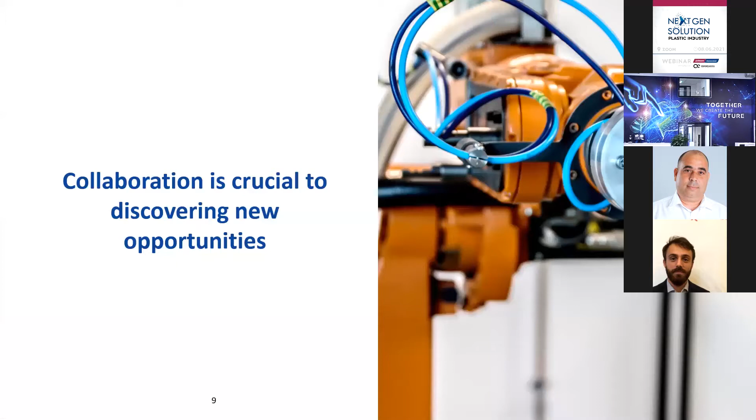Next one, please. It was the previous one.

Yes, this is correct. Hydraulic oils, as you probably know, are an almost invisible component. Some of them are really invisible, transparent. They are a component that may account for less than 1% of your total operating costs, a very small amount. But this component is critical to keep your equipment running, and running well.

We always use this kind of metaphor: while the hydraulic pump is considered the heartbeat of your injection molding machine and of the hydraulic system itself, the oil would be the lifeblood that transmits the power throughout the system and the equipment. With this metaphor, you can understand how much we care about hydraulic oils and how important they could be for the correct operation of your equipment.

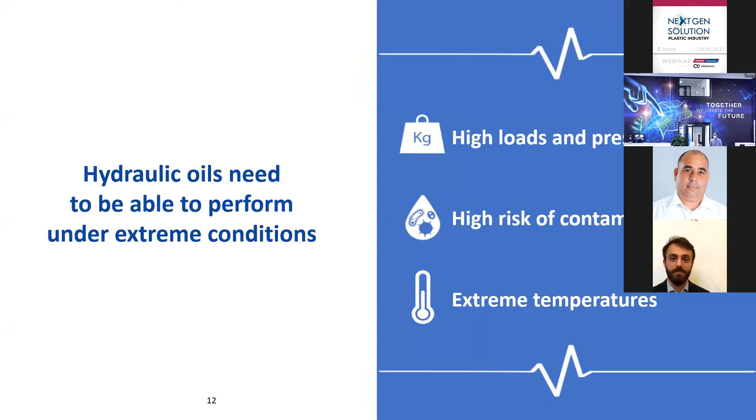Thanks. As I told you, hydraulic oils need to perform under extreme conditions. They have to withstand sometimes extreme loads and pressures, up to 60,000 tons, sometimes in high pressure systems, high levels of contamination that, of course, can be harmful for your equipment if not treated well, and they should operate in a wide range of severe operating conditions, sometimes with temperatures that can go up to 100 degrees centigrade.

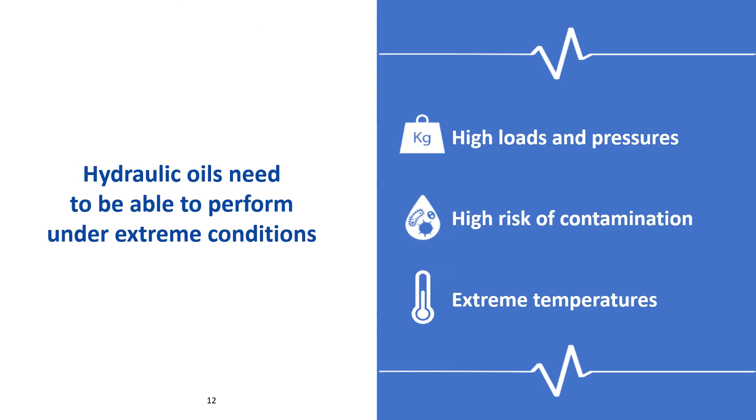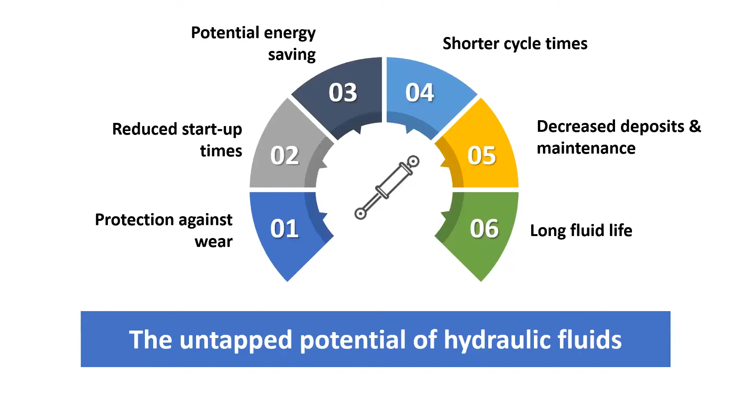We can go to the next one, please. High performance hydraulic fluids can offer an important range of benefits, including extended protection against wear, potential to reduce startup times, sometimes saving energy, reducing cost, enhancing efficiency, and of course increasing the uptime of your facility.

You can go to the next one. We as ExxonMobil, and our distributors, our Mobil authorized distributors, have the products and all the services that can help you safeguard your productivity.

Let's have a look now at hydraulic oil of the series DTE 10 Excel, that can help you reduce cost and improve productivity. For the sake of time, today we will be focusing on DTE 10 Excel and on hydraulic efficiencies, one of the potential benefits, as I told you. DTE 10 Excel is our top performing high viscosity index, zinc-free mineral hydraulic oil.

Okay, let's start and have a look first at a small summary of the theory behind hydraulic efficiency. In a hydraulic pump, when the pump starts to rotate to activate the hydraulic unit in your injection molding machine, we can identify two different dissipative phenomena.

The first one is linked to the power that the pump needs to pump the oil throughout the system itself. We define this as mechanical efficiency, the energy wasted to rotate the pump and win the internal frictional losses of the fluid. The second phenomenon is linked to internal leakages in the pump and is called volumetric efficiency.

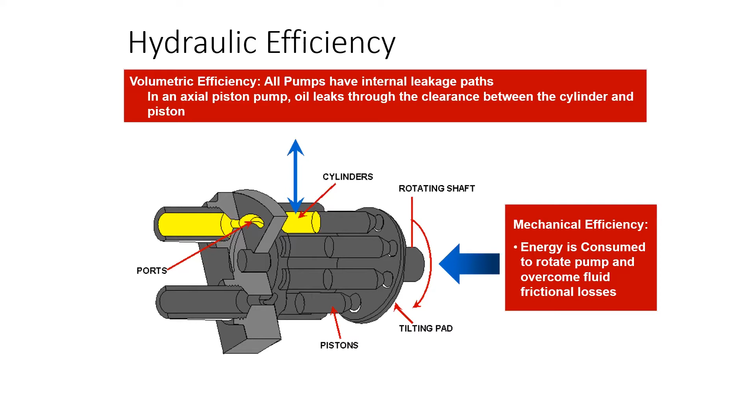Well, you probably know that viscosity varies with temperature. As temperature increases, viscosity decreases. During a day of production, conditions such as temperature may vary for several reasons. For example, when we start up equipment, it is cold, and during the day it warms up. Late equipment sluggishness is sometimes called PM fade, and this is due to the loss of volumetric efficiency because of temperature increases.

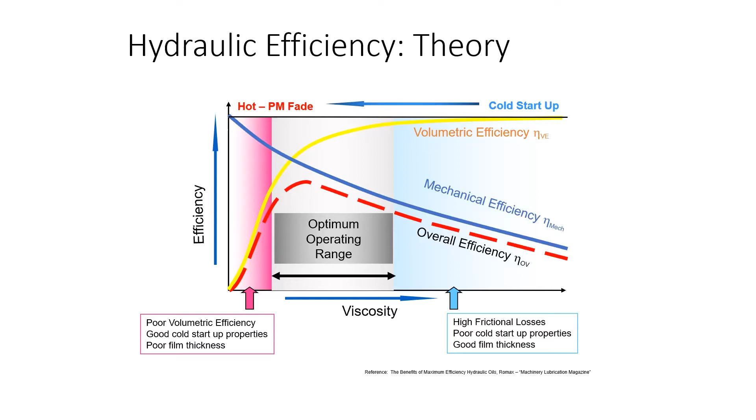So high viscosity index allows you to have higher viscosity at higher temperature, that contributes to better efficiency at higher temperature, better volumetric efficiency at higher temperature. And the high viscosity index gives you lower viscosity in cold environment, which means you will use less energy to pump the oil during startups.

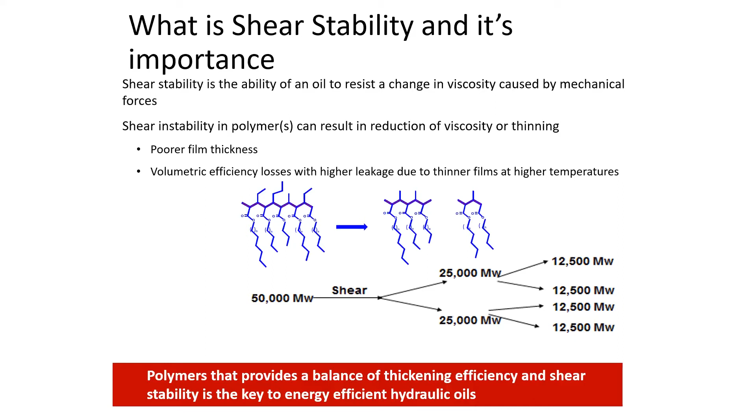The shear stress is not an uncommon situation. It is usual to stress the oil with shear forces, for example, in the pump of the hydraulic system. If the polymers are not well selected and are not able to withstand this shear stress, they will break down, causing viscosity drop, and of course loss of viscosity-temperature characteristics of the fluid. Let's move to the next slide, please.

To test these shear stability properties, there is a bench test called the KRL test, and it can be used to simulate high shear conditions, to accelerate the viscosity breakdown and to compare results between products.

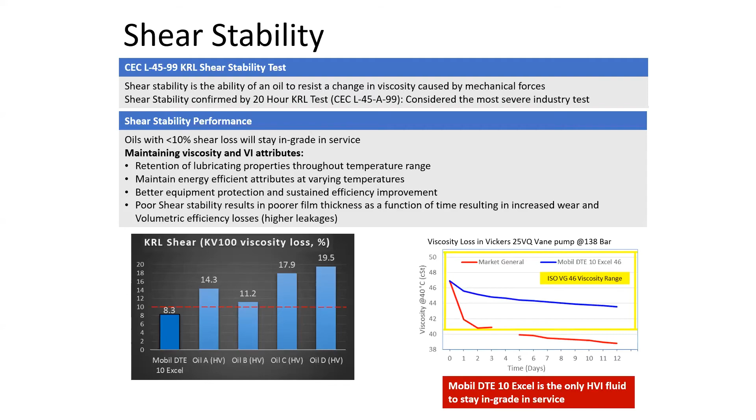I showed you how the right product can lead to a potential benefit in terms of energy savings. Now I would like to talk about how our lubrication engineers can prove, and have proved, this benefit on the field, measuring directly from operating machines. First, let's have a look at an indirect measurement of energy efficiency.

Using thermal images on the same equipment before and after changing the oil to DTE 10 Excel, we were able to observe a decrease in temperature of the equipment.

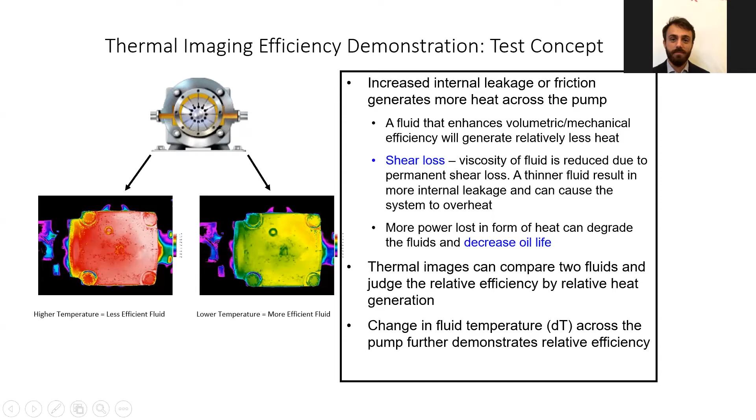As you can see in the picture in this slide, these are pictures of a pump. The right one is using DTE 10 Excel, while the left one is using a non-high viscosity index, non-energy efficient oil. You can see that the pump working with DTE 10 Excel has a lower operating temperature.

This decrease in temperature is linked to the fact that the fluid generates less volumetric and mechanical losses. Those reduced losses generate less heat in the pump, and as a consequence the temperature will be lower and overall efficiency will be higher.

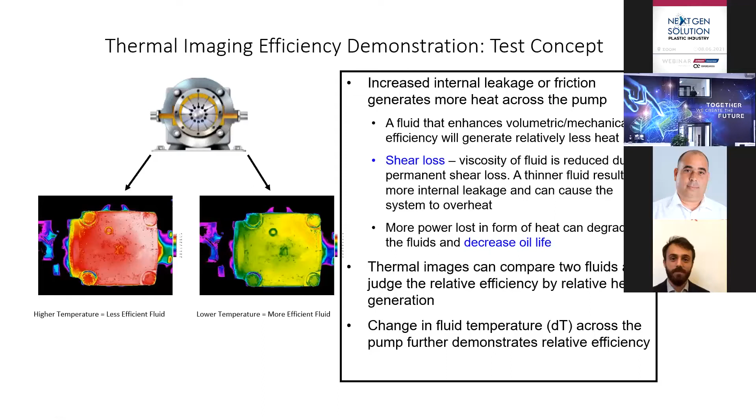Of course, we can also measure directly the energy efficiency improvement. It's a little bit more complex, but we are able to do it. We have all the equipment and knowledge needed, and we can measure directly the energy consumption for a given period of time.

We usually run a test on a machine that we call an A-B test. We start with product A, the usual product, then we switch to DTE 10 Excel, product B, and measure both products under the same operating conditions. Then we plot the results. We need to take measurements for quite a long amount of time in order to have meaningful data, which we then analyze.

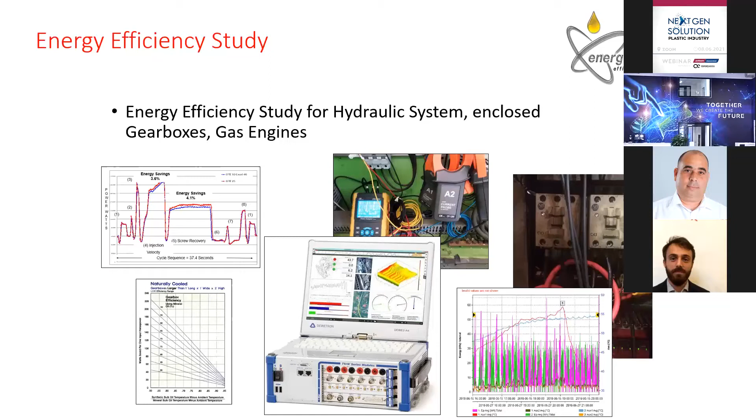For each cycle we look at how much energy saving there is. It's important that operating conditions are as close as possible when running the test with the two different products. We can go to the next slide, Lina, please.

I want to give you at first an overview of our brand new showroom here in Kottingbrunn. It has been refurbished over the last 2 months, and I want to show you which machines are available if somebody is interested to see the opportunities we have here in Kottingbrunn.

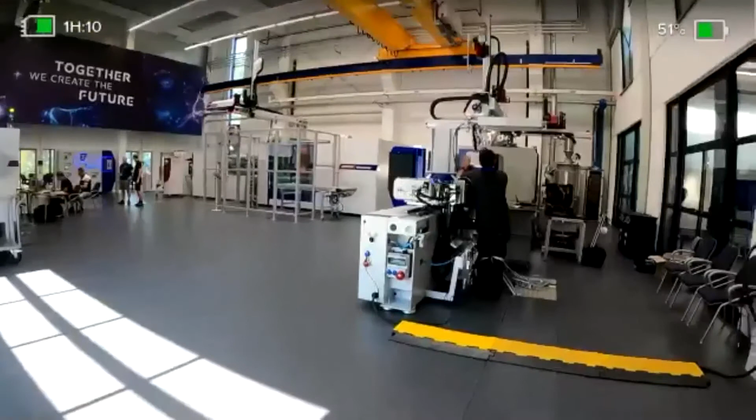Let's take a move at first to the southern part. I want to give you a short overview. We have here located 4 machines right now. One of the machines is this little smart power with 25 tons, and this smart power is prepared now for a customer in Germany. Our service technician is here already to take over the machine and bring it directly to the customer. Here's some details of the machine.

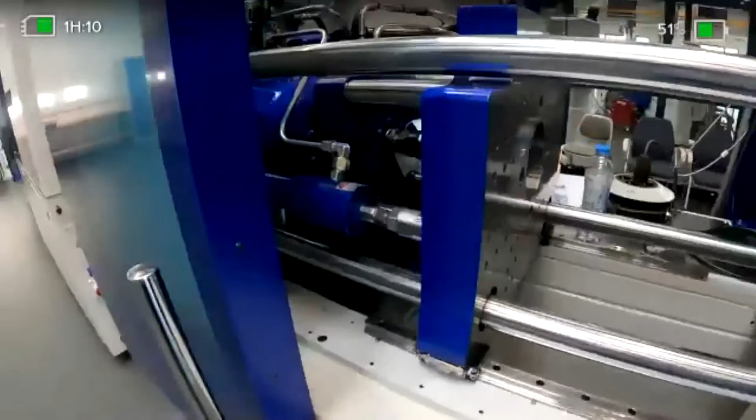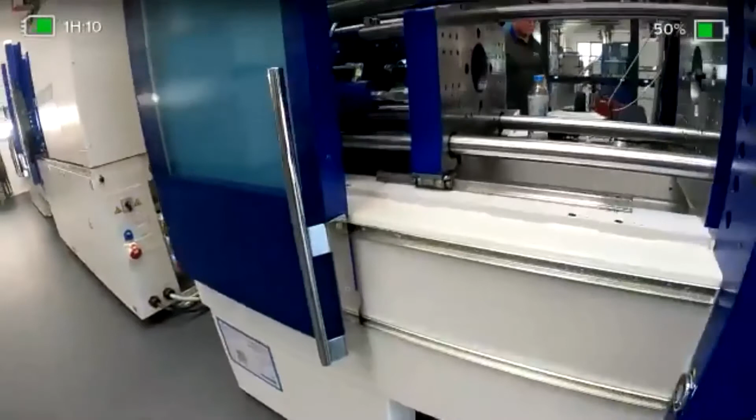This is, for example, a quick coupling system for the ejector, the hydraulic plunger here in a 3-platen version. And with the linear rails, you have the possibility to have a very competitive and very exact platen parallelity, which is important for your mold.

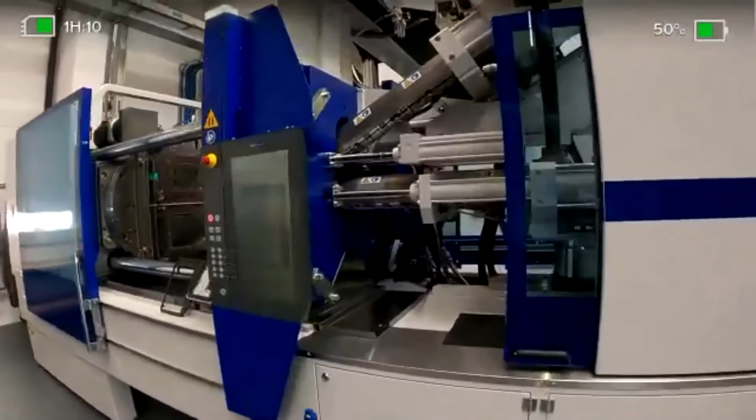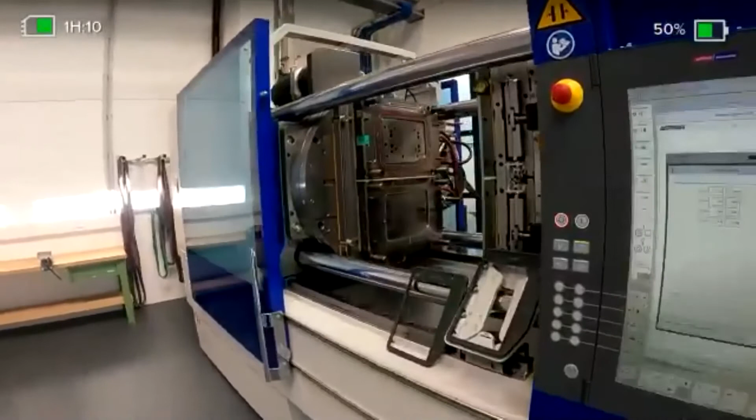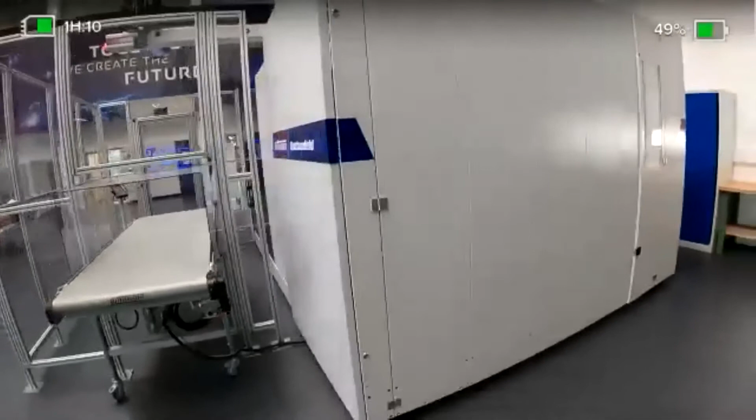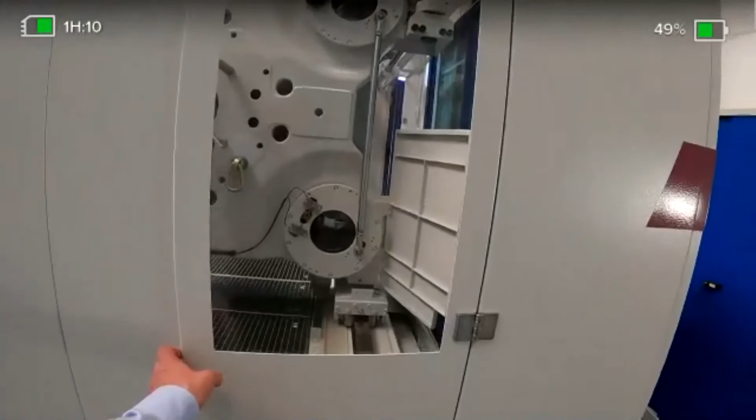Another machine is here in the back. This is a 1,100 ton machine already, a 2-platen system. I want to give you a short overview of how the machine is equipped, so I'll go through the safety door on the rear side of the machine to show you some details of the clamping unit.

It's a 2-platen machine, and as you can see, this machine is also equipped with linear rails. You have direct access here in the safety door to the ejector, equipped with a quick coupling. And very interesting is also the 2-platen system. When you look inside, you can see the quick lock system.

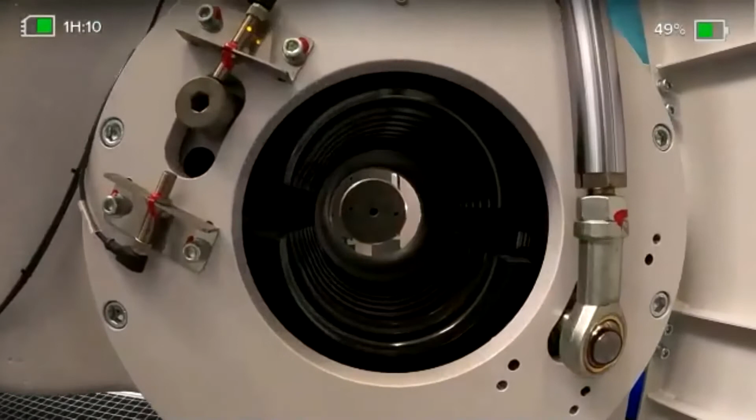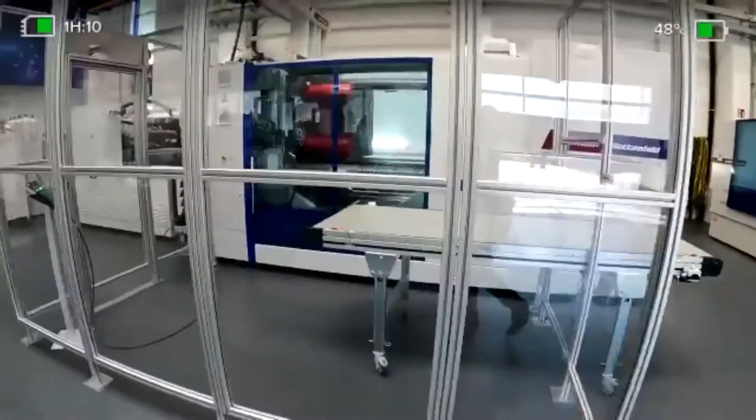The advantage of the system is that you have a possibility to move in the mold from the side, because the tie bars swivel out of the machine. So you can move in the mold from the side and not from the top, especially interesting for executions where the ceiling height is not too big.

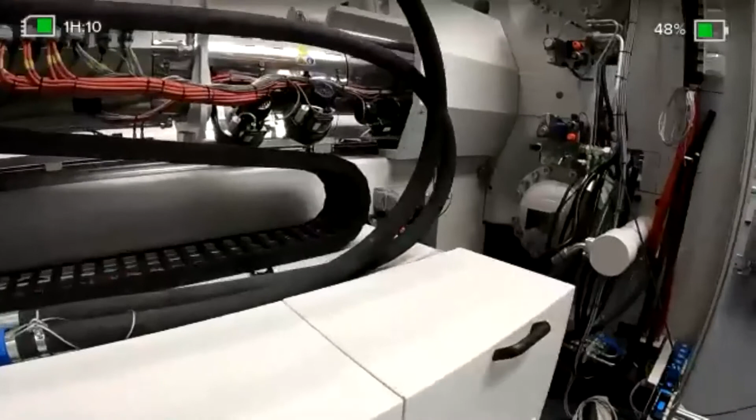This special machine is equipped with a Cellmould system. What is Cellmould? It's a foaming agent introduced with nitrogen into the machine, located here directly at the barrel. With this execution, you can make lightweight parts, which reduces the weight of the product, and not only the weight - it also reduces the clamping force a little bit because the internal cavity pressure is lower than usual.

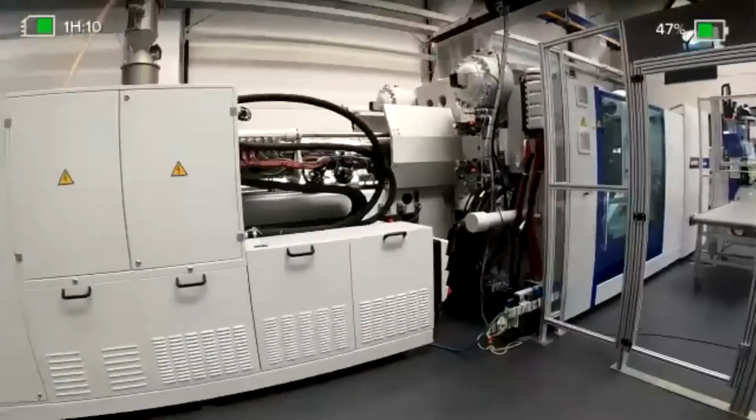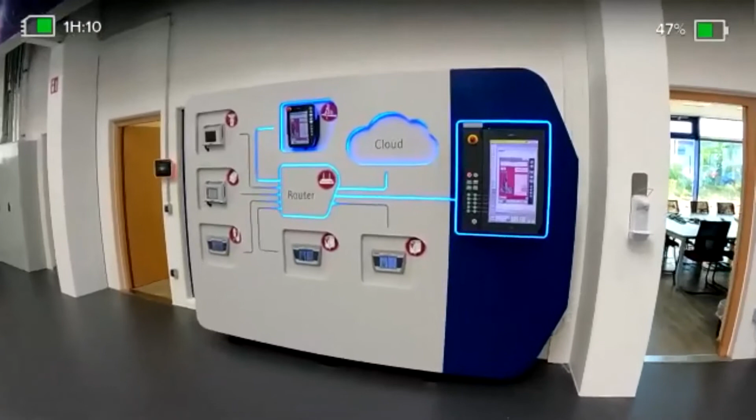In this area you can see now the 4.0 system of Wittmann. This is the answer to the Industry 4.0 system, and this execution integrates all the peripheral units from Wittmann.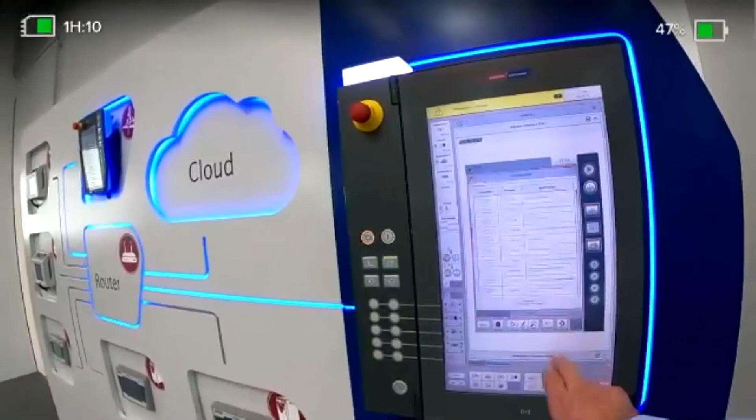Here you can see the robot, which is integrated into the system. You can handle the robot here, open up the alarms, and go to the other side - when you do the same here, it's the same possibility. So you can operate the robot on the machine panel as well as on the panel of the robot.

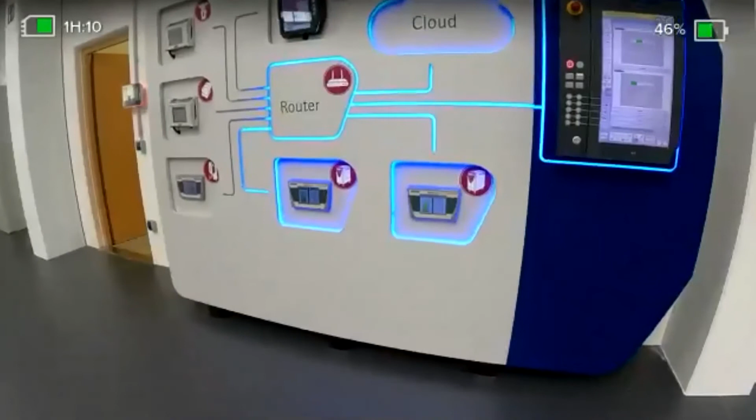When you go to the tempering units, you can see those tempering units also working on the control system. The big advantage is, if you have any issues, you have the possibility to service the tempering units also directly on the screen.

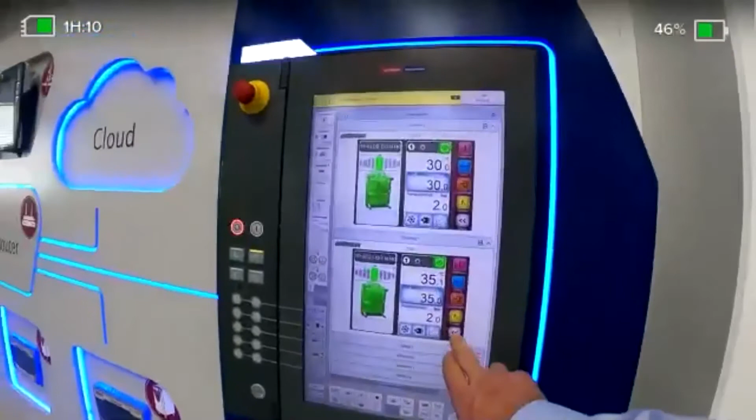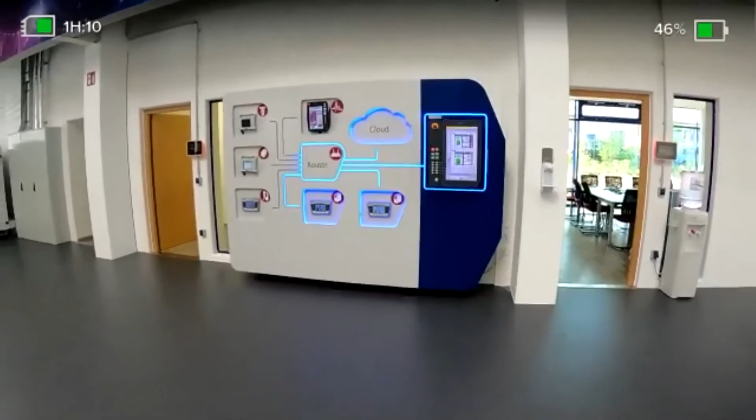And the big advantage is also, when you go to a web station with the machine, then you have access to the external units as well.

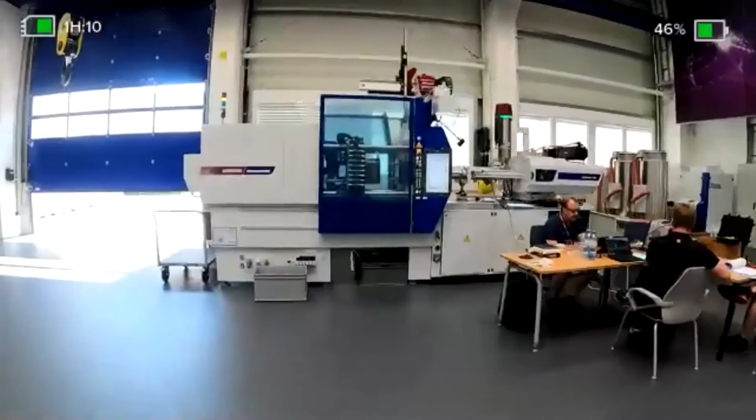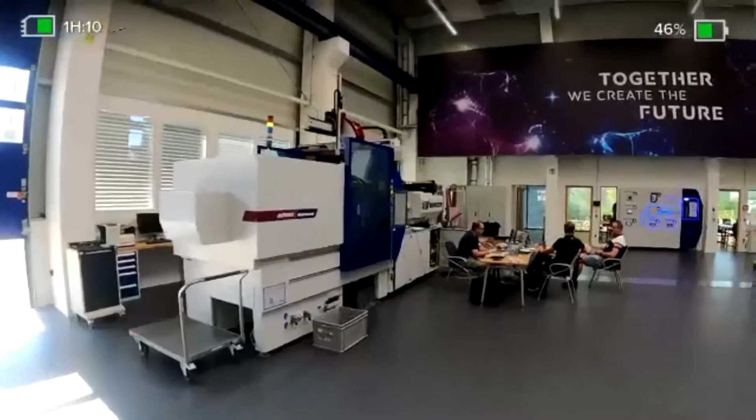In this range, we're making a test run with LEGO. They have a very special machine equipped, and the test run will take about a week. If the acceptance run goes perfectly, they will take over the machine equipped with a robot, the Wittmann robot, and it's a fully electric machine, EcoPower 160 tons.

Going back now to the northern part of our showroom, I will show you the machines available here in the northern area. I would like to start with one of our machines available for customer test runs - this is our SmartPower 120, also a hydraulic machine.

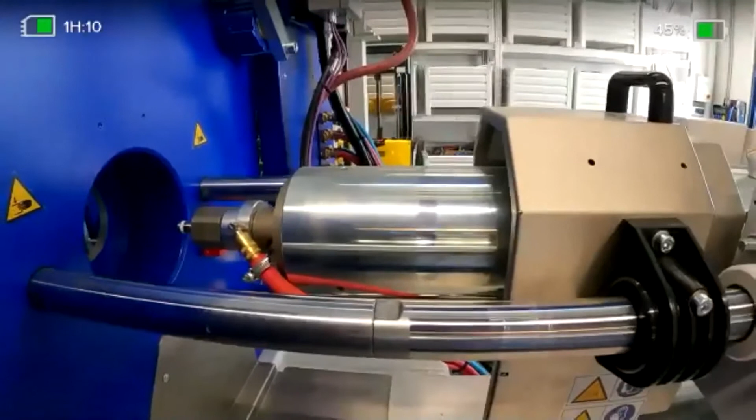This machine is equipped with a liquid silicone rubber barrel, and that could be implemented in any machine, also our smallest machine, the MicroPower, which we'll see a little later. Here you can see the barrel, which is equipped with cooling water, and so therefore there are no heater bands available.

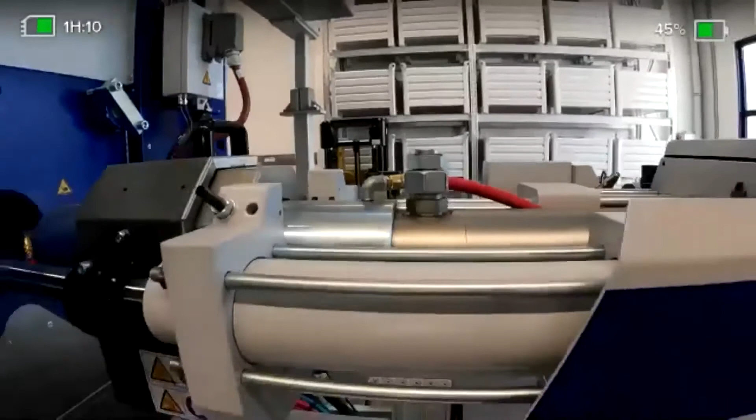We have a very special execution of a shut-off nozzle that is necessary for this kind of application for LIM, and this is the connection for the material. If you're interested, we could also install an LIM pump that transports the material right into the machine. So this is a 120-ton hydraulic machine.

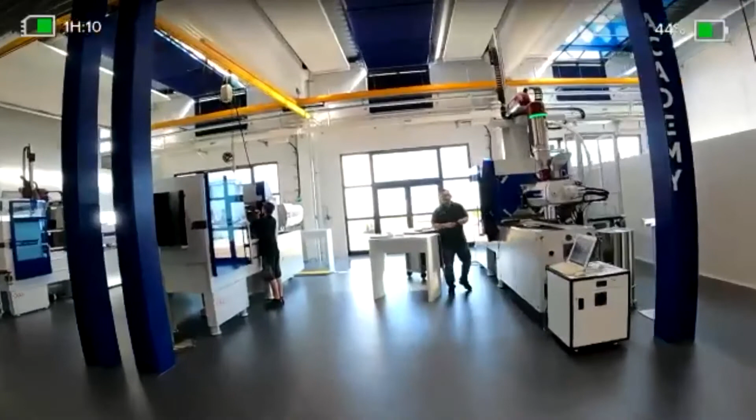And if you move over, you can see here our academy, which is right now in the scenery of application, and Christian Setko is here, and he will explain a little bit what he is doing.

Hi, Christian. Dear guests, welcome to our training area. Currently, I'm preparing this Smart Power machine for my upcoming customer training. The application will be a small lunchbox made of food-grade material.

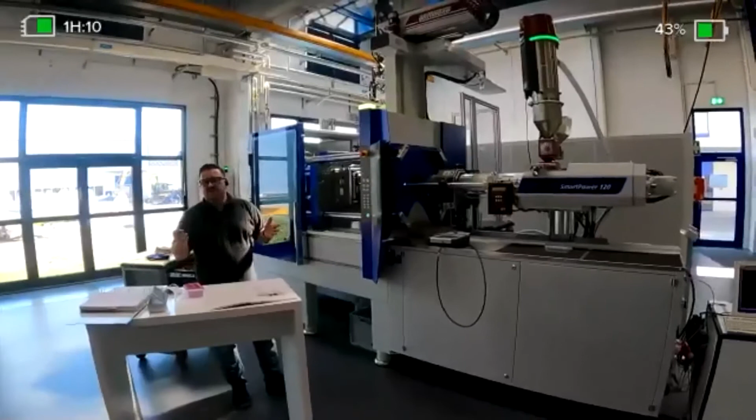Actually, the customer knows about the injection molding process, but he wants to know more details about the B8 controller, so we will do a basic B8 setter seminar. Of course, we offer different kinds of trainings on the machine and on our equipment. For example, usage of the different machine types: Smart Power, Eco Power, Micro Power, Micro and Macro Power, and also maintenance and service.

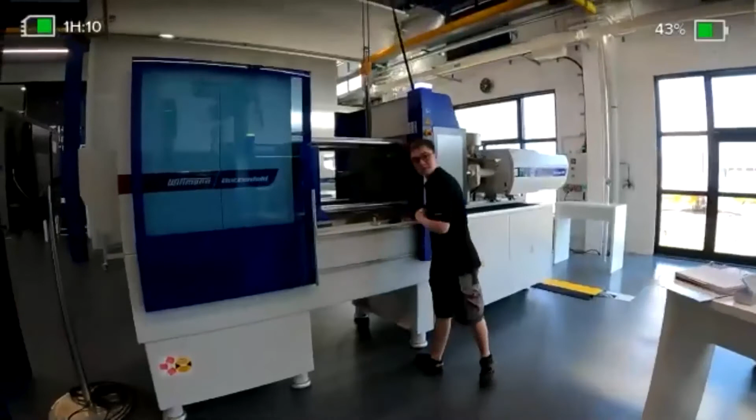Right now, I see there's something going on here in the training area. This is Stefan. Stefan, could you explain what you're doing right now? Customer test, right? That is scheduled for next week. Right now I'm fixing the plate on the nozzle side, and then later I will close the open side, and then I will fix the plate here. Thank you, Stefan.

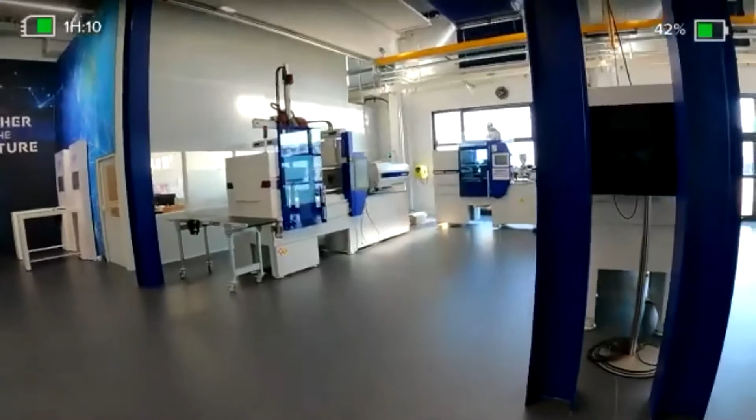So this is the training area, which is equipped with 4 machines with different executions, available also for different kinds of trainings. So we have room for 8 persons maximum.

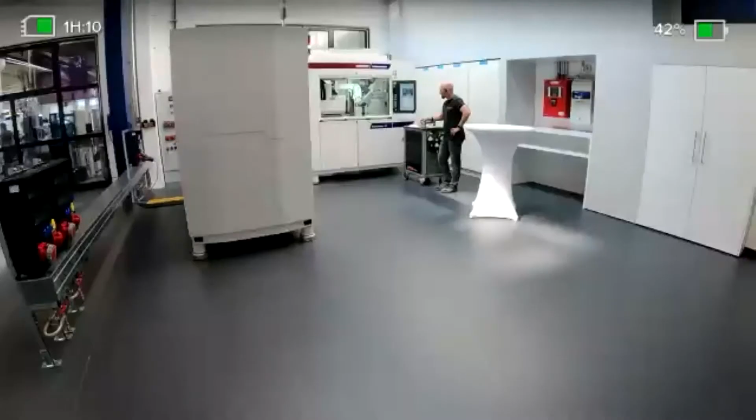If you're going back now to the other area here in the back, I can show you that really unique injection molding machine, which is called the Micro Power, and the name stands for itself. It means that we are producing parts in micrograms. And here, this is Martin, and Martin could explain us a little bit about this machine.

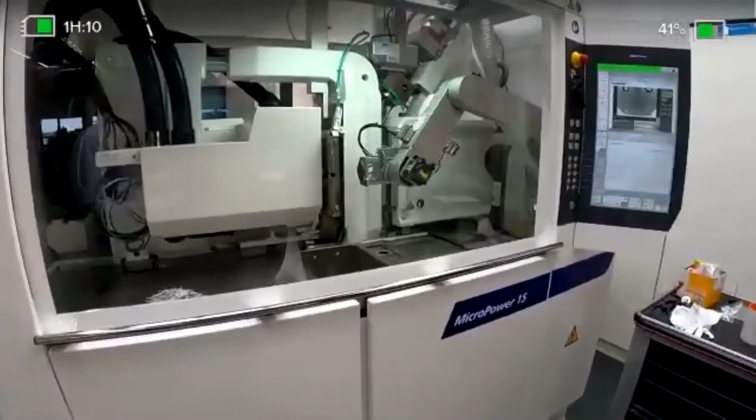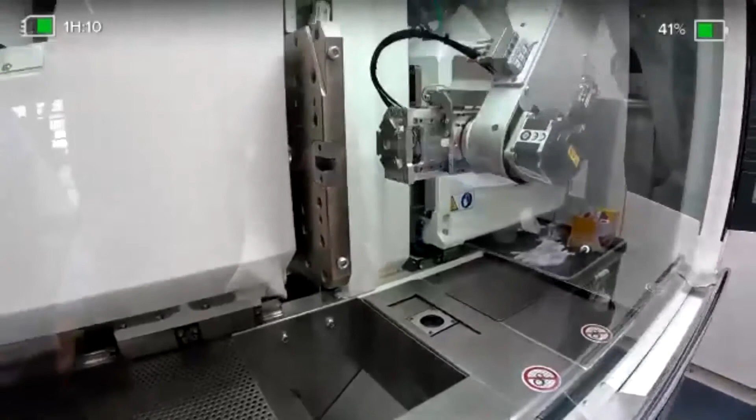What is the thing on this machine? Let's talk about it a little bit. Well, also from my side, welcome and good morning. Especially about this machine is, like the name is already explaining, it's especially designed for micro parts, that means parts far below 1 gram. Currently, the machine is fully equipped with robot, with a vision system, so a small production cell on its own. And currently I'm carrying out here a material test for a customer. I'm producing here a test bar just to see how the material is behaving in a real production run.

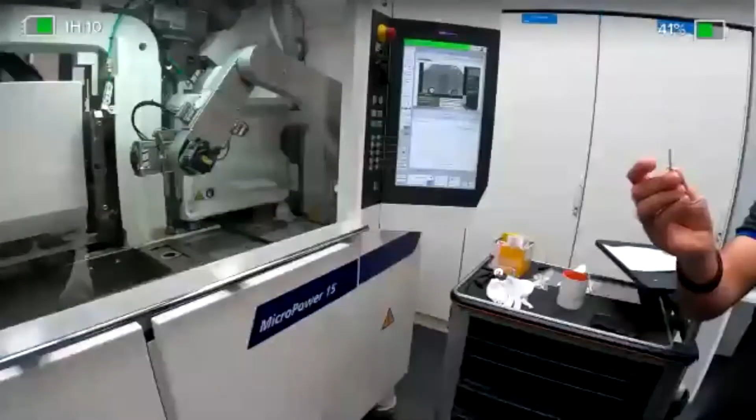Martin, this is a product that's just a small test bar, a thin-walled test bar. I hope everybody can see this. But this is not a very typical micro molding part. Do you have something else? Yes, of course. I prepared here on the microscope a few different parts. Well, this is, for example, a very typical part for the micro machine, because this is a medical tip which is used for operations, for micro-invasive operations to close wounds, arteries and veins and so on.

This is an electrical part, which is a two-component part, used for record players. And the big round part here is a part of a cosmetic pump, so for deodorants, sprays, and so on.

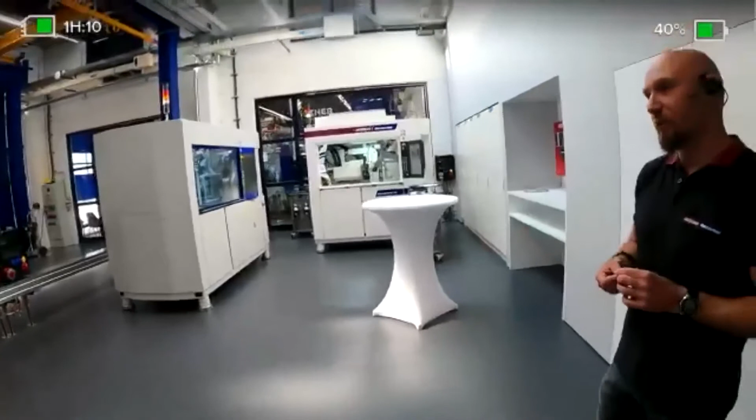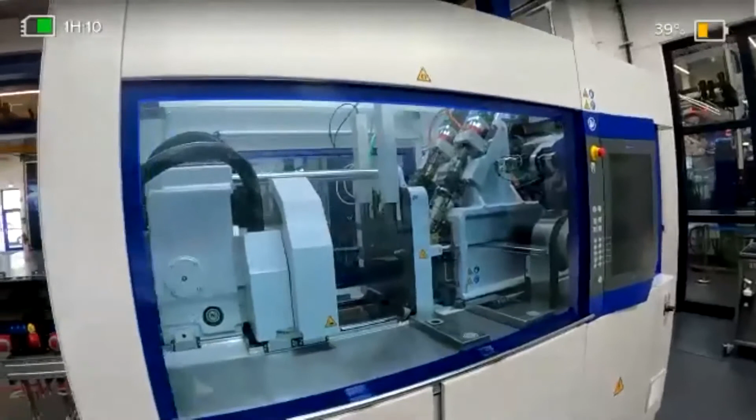Martin, that sounds great. This is an all-electric machine. Exactly, it's a full electric machine, especially designed for medical applications. And it's not only designed for medical applications, we have here another machine equipped with a second injection unit, so this machine is also available in a two-component execution. Furthermore, we have also the possibility to work here on the micro machine with liquid silicone rubber. So this machine is fully equipped, it's a micro cell, you could say. Thank you, Martin. You're welcome.

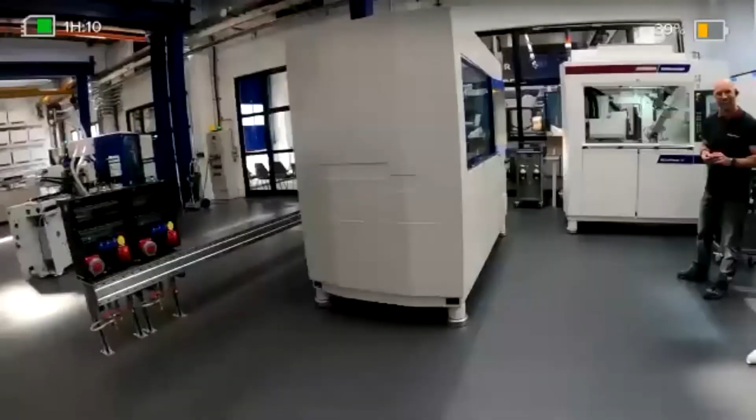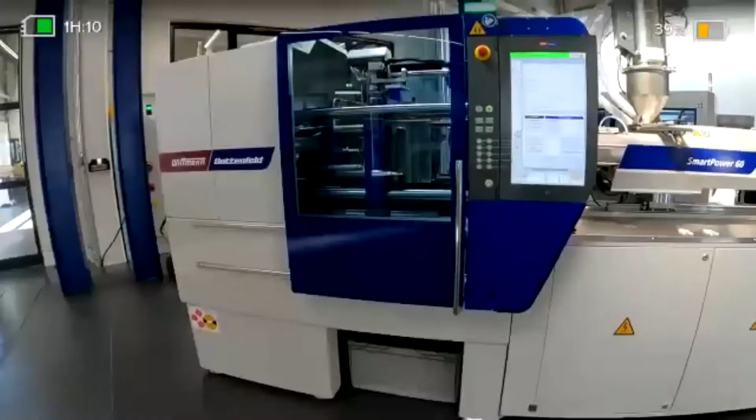Now let's go back to the machine we have seen at the beginning, back to Smart Power, our 60-ton Smart Power here. This machine is equipped with, we heard it already from Matteo, a servo motor, and I call it a servo hybrid system, because the big advantage of this machine is the energy consumption. This machine has the lowest energy consumption on the market, and this is due to the drive on demand system, which is equipped in the machine frame down underneath the machine. This drive only works when the machine is moving. The machine right now is moving in a dry cycle.

And when we go a little bit around the machine, we can see here the connections, and Matteo mentioned that already. Hydraulic oil is a very specific item in a machine, and it also has influence on the energy consumption of the machine, and therefore we are utilizing HLP32.

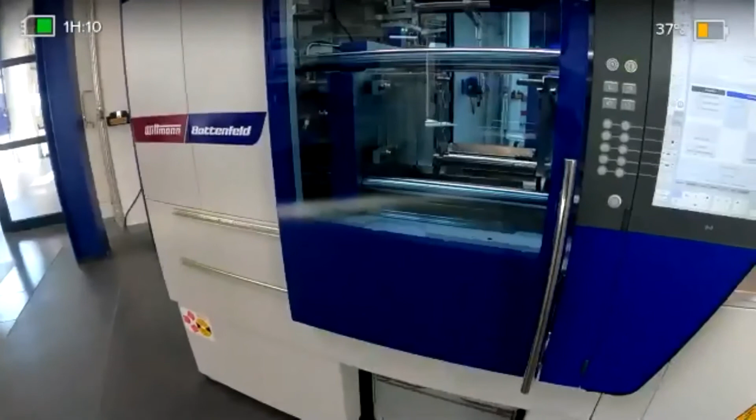This oil gives us the opportunity to reduce energy consumption as well. And there is another part in the machine, we call it the KERS system, probably you know it from Formula One, that gives us the possibility to transfer braking energy from the machine as it moves down in the closing movement, for example, for the third zone of the barrel, which is located here, right on the barrel, in this area.

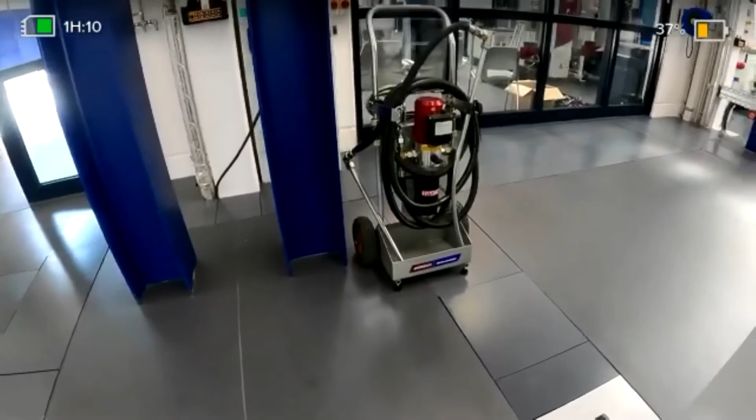And this energy will be used for the heating of the machine as well. Coming back now to the oil tank, here we have two connections possible for the opportunity to clean the oil separately. The machine is already equipped with a filter system, but we also recommend using an external filtering unit, which is also available from Wittmann Battenfeld.

And you have the possibility from ExxonMobil to certify the oil and make tests with it, so you know if your oil is in perfect condition or not.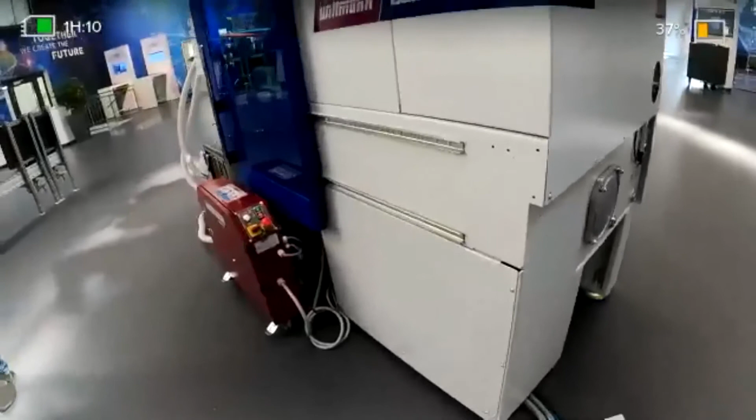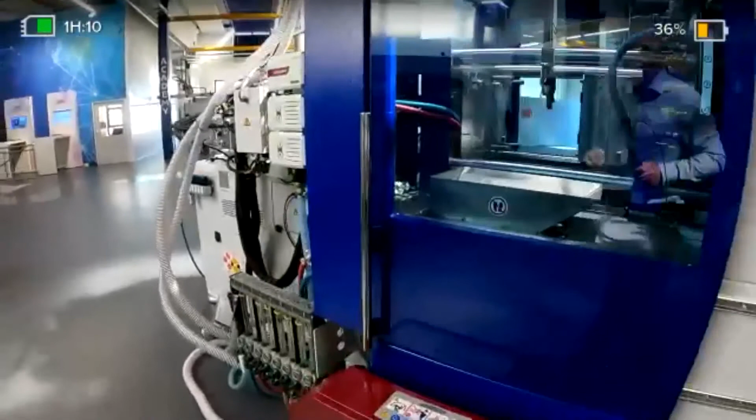This Smart Power is called an in-grinder Smart Power. What is the advantage of this in-grinder? We have here several units from the Wittmann group integrated into the machine, and the big advantage is that you can take out sprues.

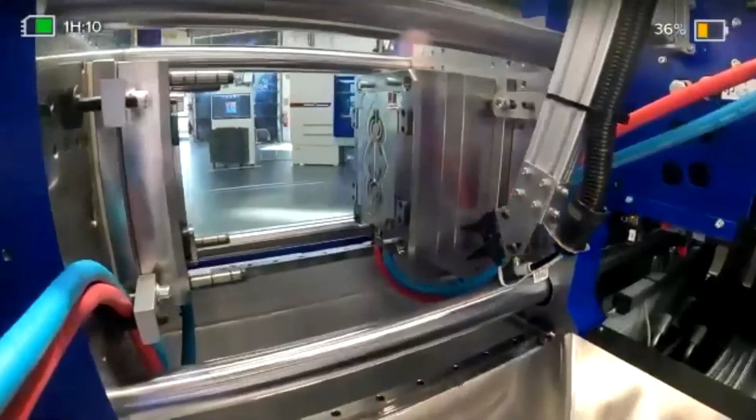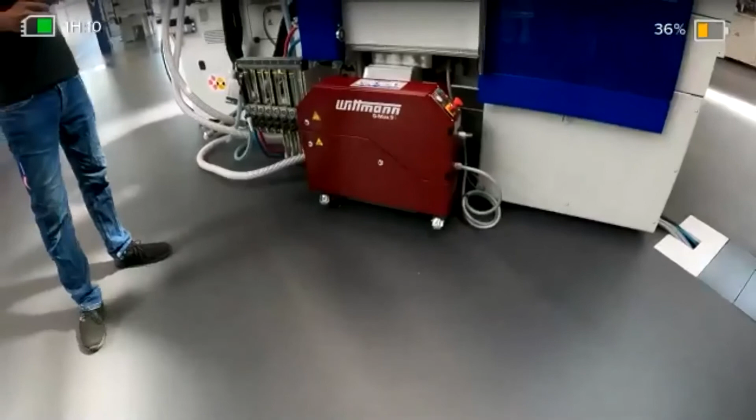This is a 2-cavity mold with a sprue inside the mold, and we take out the sprue with the handling unit. It's a WP50, then it moves out during the cycle and lets the runner fall right into the chute of the machine. The chute is integrated in the machine frame itself, and then it falls down into the G-Max 9, which is also a component from Wittmann Battenfeld.

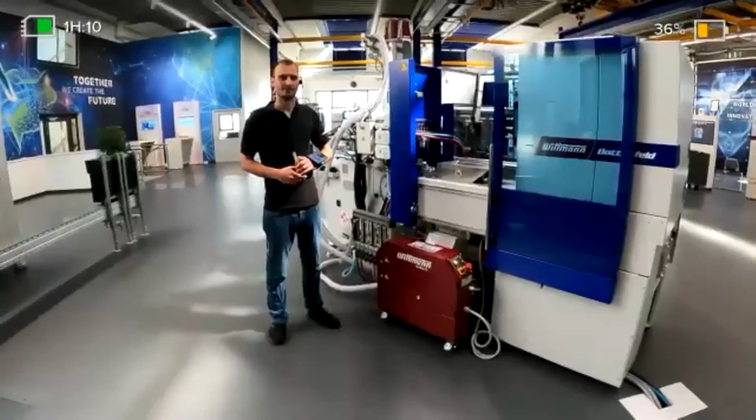And here is Jochen, he is head of this showroom center, and he will explain a little more about this special execution of our Smart Power.

Hello, nice to hear you. Nice to see you. I hope you can hear me. Yeah. So yeah, Christian, you're right.

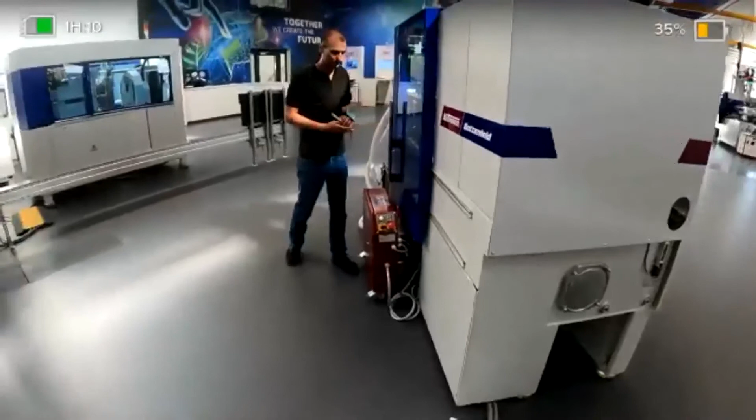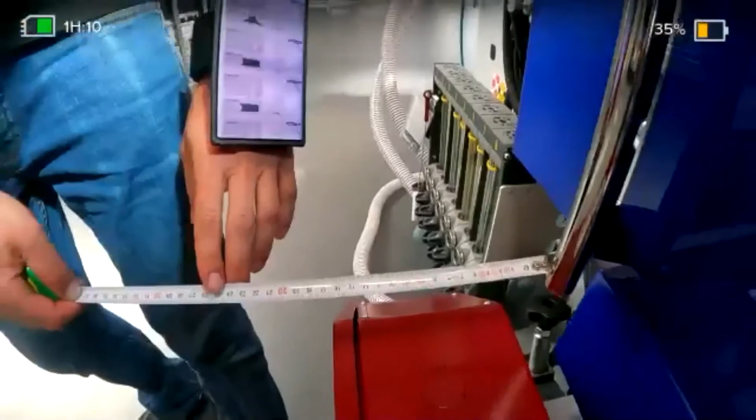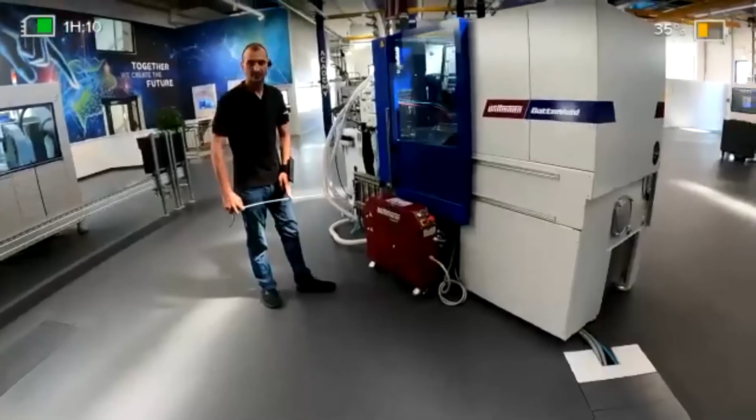This is a perfect solution to save a lot of space, because here we have just 180 millimeters of space, and with a standard granulator you need about 500 millimeters. So it's like this, and you save a lot of space here inside.

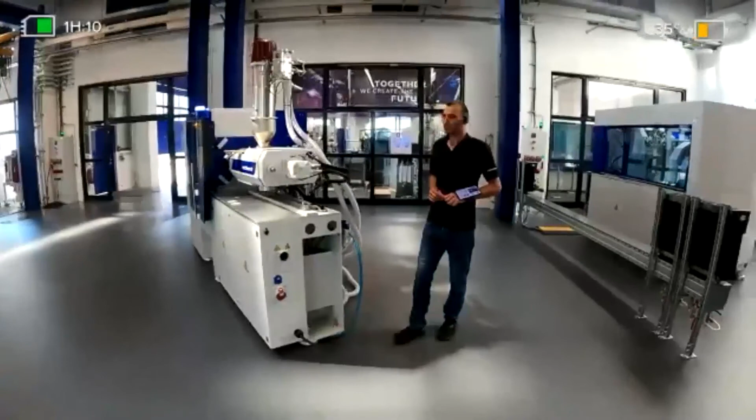And the next benefit of this in-grinder solution is that the reground material can be fed back with our FEEDMAX S3 net and a separated valve that is available, and you can mix the regrind material with the virgin material. At this solution, we take about 20% regrinded material mixed with virgin material.

Regrind is a good point, because typically the regrind has fluctuations in viscosity. What is available here? Well, Christian, that's right.

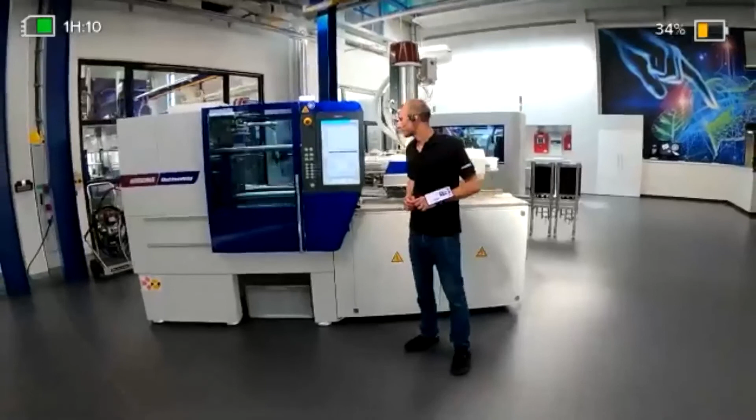This machine has a HiQ package, and in this application we use the HiQ Flow package. It means the machine itself measures the viscosity of the material, and if the viscosity of the material inside the barrel is changing, the machine will automatically set up the holding pressure or the changeover point, so that you get the best solution for your parts every time.

Okay, thank you, Jochen. Thank you, Jochen.

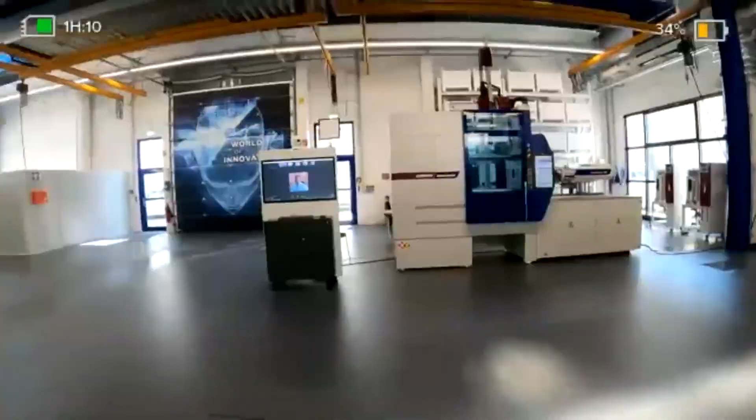And now we are right at the end of our presentation. I want to remind you, you're always welcome here in Kottingbrunn. So if you have any use for an injection molding machine, or just for auxiliary equipment or robots, then please contact us or contact Stanislav. I want to thank you for your attention and bring you best regards from Austria to Bulgaria, and have a nice day. Thank you very much.

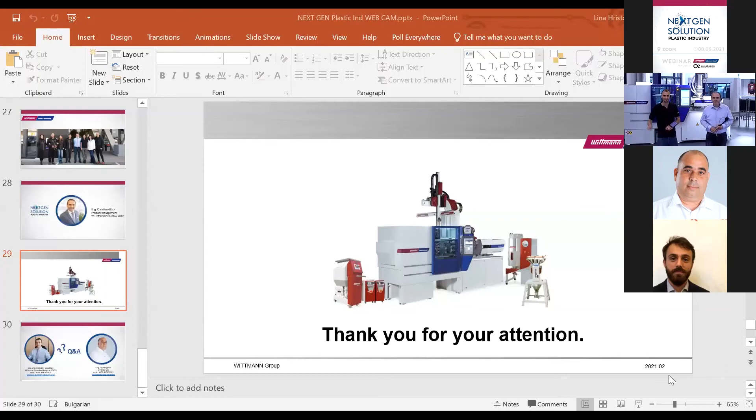Thank you. Thank you very much, Mr. Glück. Exceptional live presentation. Thank you. It was a great pleasure for me to participate. Thank you. Thanks again to our guests from ExxonMobil and Wittmann Battenfeld.